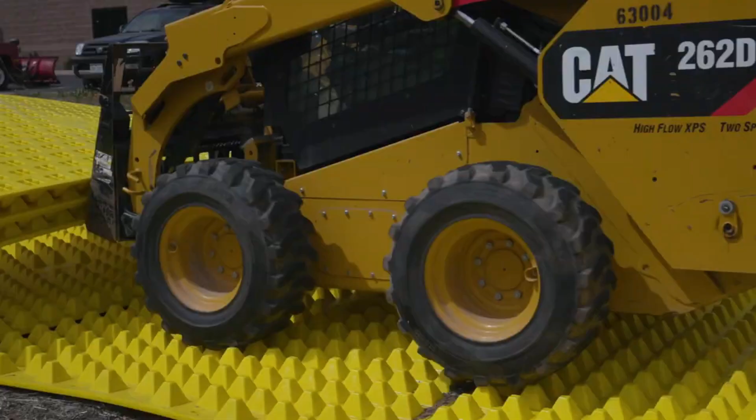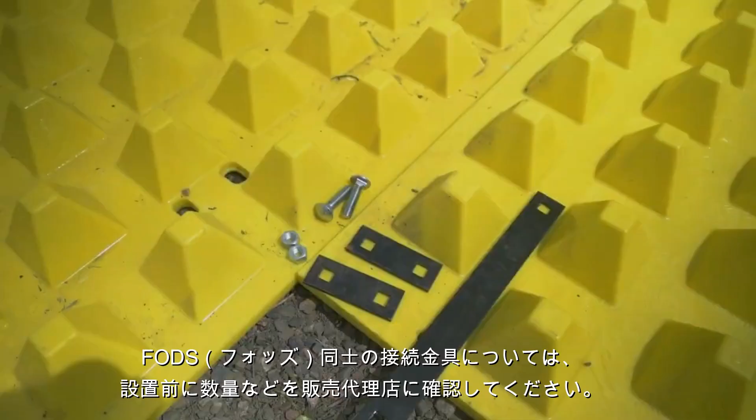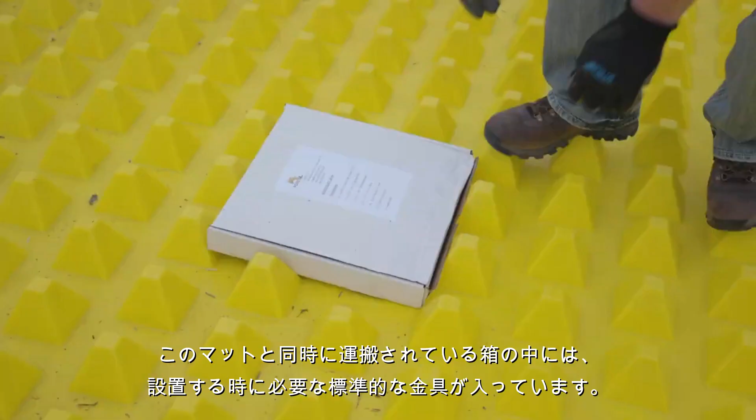Your Fods TRACKOUT control system can easily be transported and relocated by the equipment you have on hand. Prior to installation, check with your distributor concerning your hardware. Your hardware will be delivered in a black Fods bucket, or you will find the Fods hardware box nestled within the mats. The bucket and box contain the hardware required to complete the typical 4-mat installation.

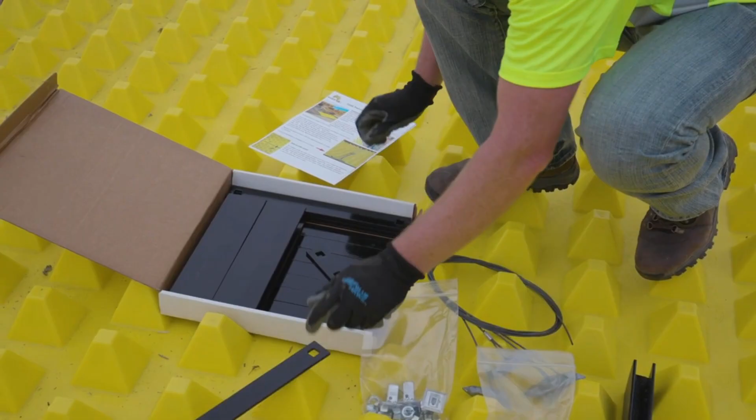If you're doing an 8-mat installation, you will need 2 Fods hardware boxes or buckets. Your hardware box should contain long and short steel plates, nuts and bolts, and H-brackets. Here is a list of tools we recommend you have on hand for installation.

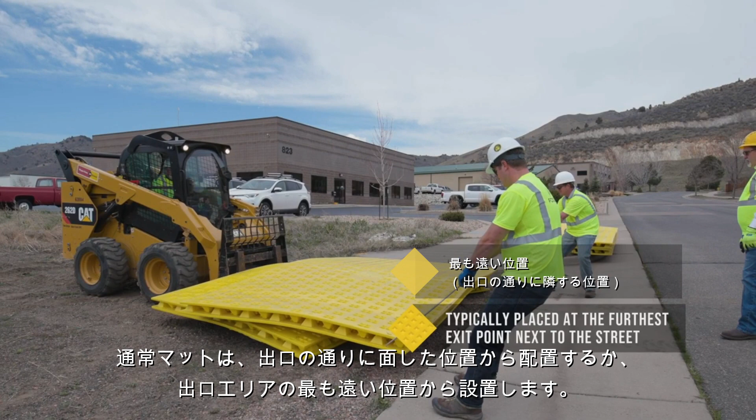When you're ready to install your system, map out where you would like to place the mats. Typically, the mats are placed at the furthest exit point next to the street or the furthest point of egress. Place the mats in the appropriate configuration and then pull them into place using Fods hooks. Make sure to align the mats so vehicles exiting have a clear path of travel and are clear of obstacles.

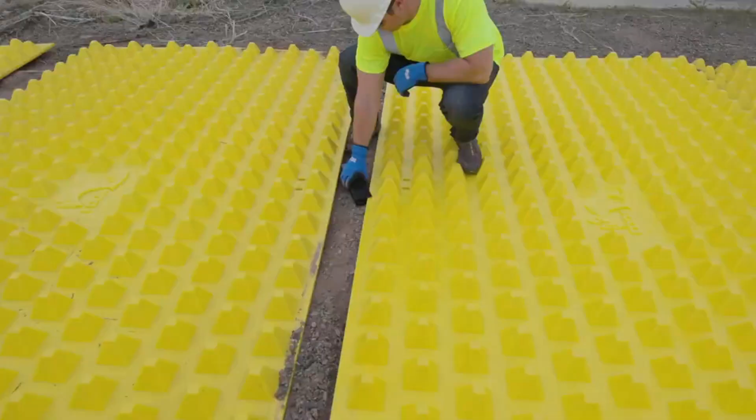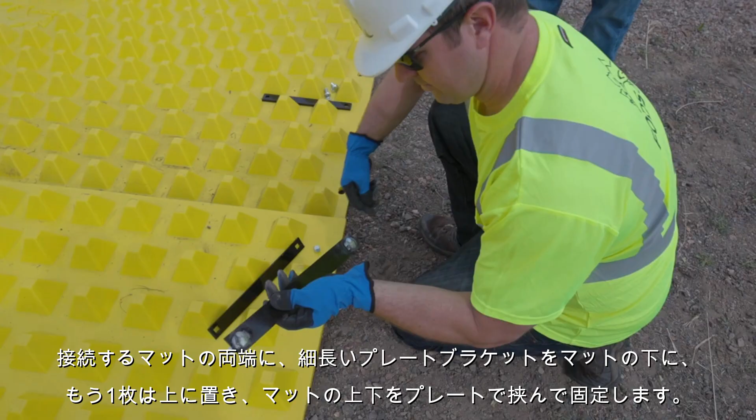Place the H bracket in between mats so the lip of each mat is inside the H bracket. Once the H bracket is in place, pull mats together tightly using Fods hooks. Connect the mats together using 2 long steel straps. Place 1 long strap under the edge of the 2 mats that will be connected. Place the second long steel strap on the top of the mat.

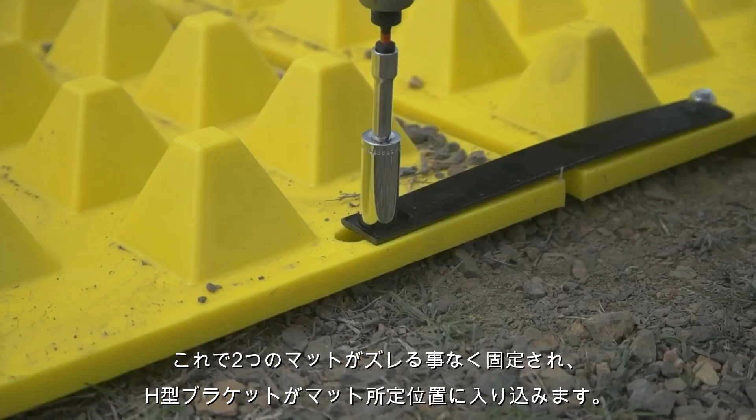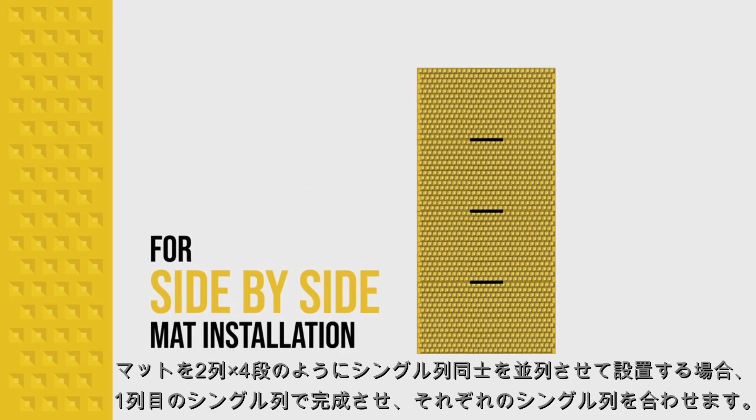Align holes. Push bolt upwards through mat and straps. Place nut onto upright bolt thread. Tighten the nut. Now the 2 mats will not pull apart and the H bracket will remain in place. For a side-by-side mat installation, such as a 2x4, install the mats as a regular single-wide orientation and add another single-wide mat adjacent to the first. On the entrance and exit mats, install the short strap as shown.

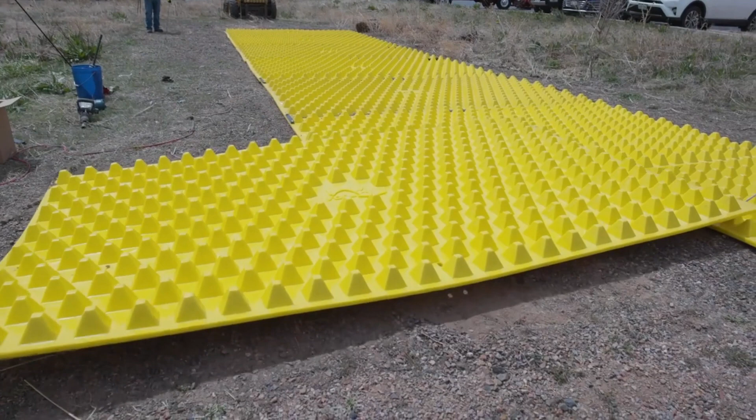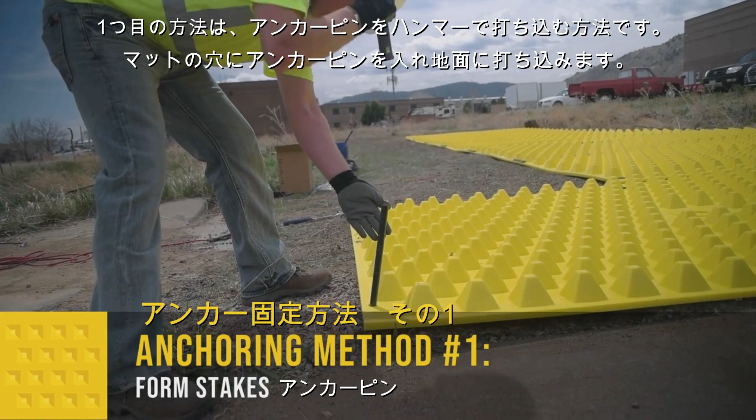A Fods TRACKOUT control system must be anchored in place for safety and to ensure proper performance. The best anchoring procedure will vary depending on use and substrate conditions of your job site. In this first method, you will hammer form stakes into the mat's pre-drilled holes where the mat is the most flush with the ground. Fods recommends a minimum of 2 stakes per mat, 1 per side.

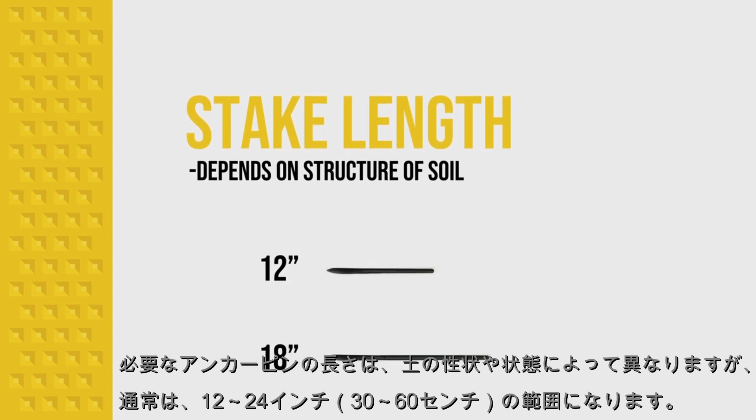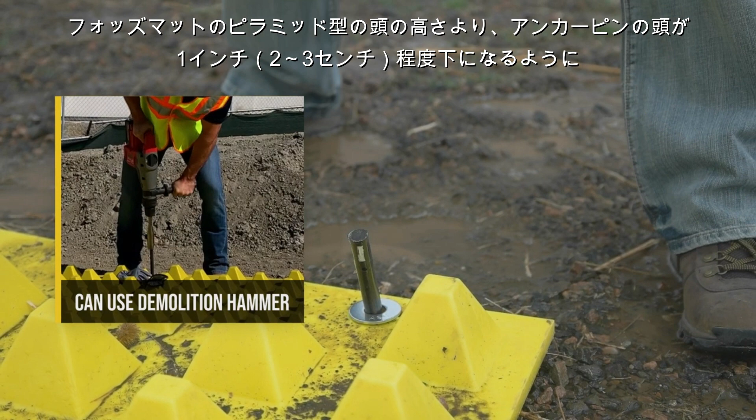The length of the stake required depends on the structure of the soil. Stakes ranging from 12 to 24 inches may be used, 18 being the most commonly used type. Please ensure the stakes have been driven a minimum of 1 inch below the top of the Fods pyramids. To prevent mats from riding up on the stakes, place a washer over the stake and secure with pin. Hammer the stake into the ground until the washer and pin are snug against the mat.

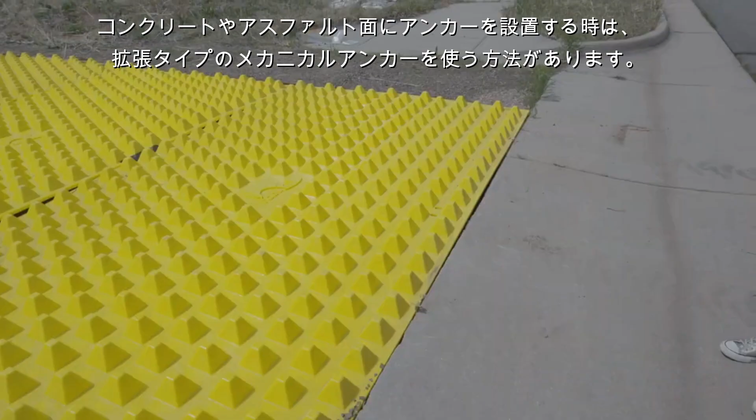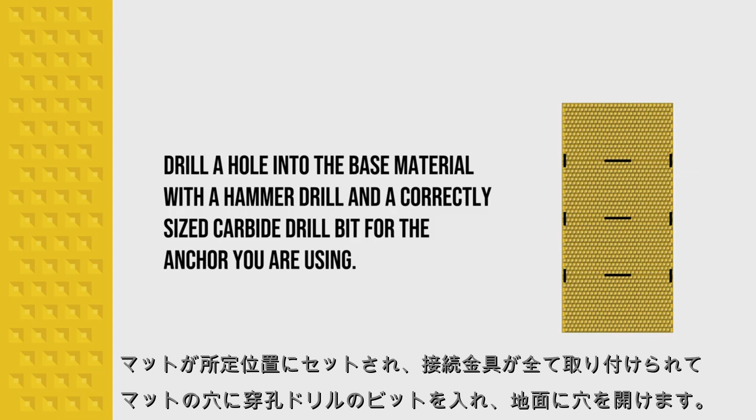To anchor the mats to asphalt or concrete, a concrete expansion bolt can be used. Make sure the mats are set in place and all hardware is properly connected. Drill a hole into the base material with a hammer drill and a correctly sized carbide drill bit for the anchor you are using. For ease, the drill bit can be inserted through the mat's pre-drilled hole where you intend to place the anchor bolt.

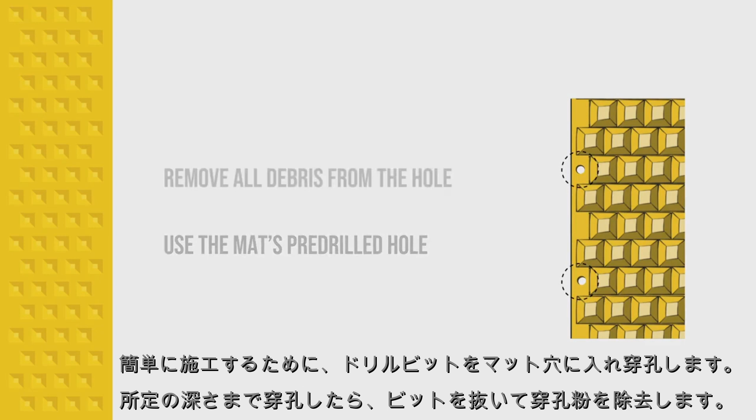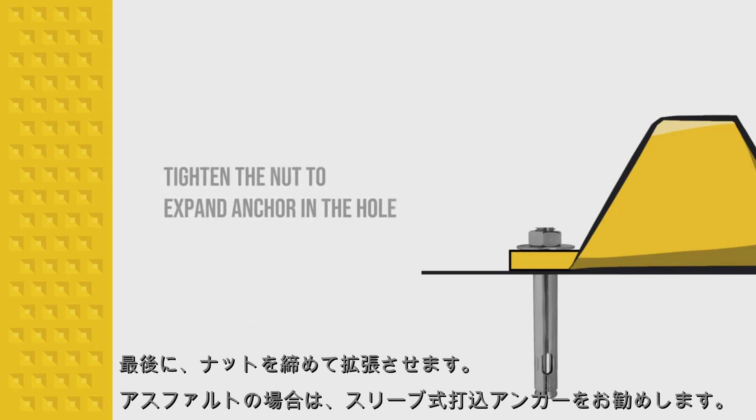Once the hole has been drilled to the proper depth, remove all debris from the hole. Next, insert the single expansion anchor into the hole and tap the fastener lightly with a hammer to ensure it is flush with the base material. Finally, tighten the nut to expand the anchor in the hole. A sleeve anchor is recommended for installation on asphalt. The recommended anchor diameter is a 3/4 inch bolt with a minimum embedment into the asphalt or concrete of 3.25 inches, or 4 inches from the top of the mat down into the hole.